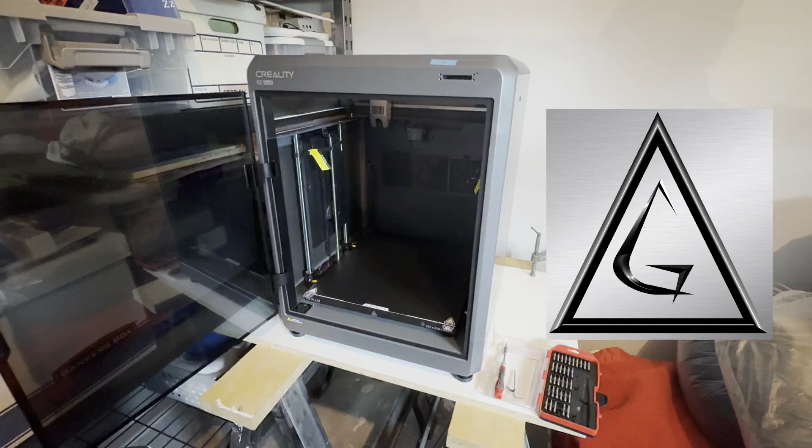Hello YouTube. I just recently got a Creality K2 Plus down in Micro Center for the Black Friday sale, and just thought I'd give you my initial impressions of everything I am seeing here.

No real need to go through an unboxing video per se to go through the procedures to unbox this. Creality has a very good unboxing instruction video on YouTube. There's a QR symbol on top of the box. And everything's just really dialed in and well thought out with how it was packaged. Let's see here. I'm going through some of the last steps now. So they show you all this.

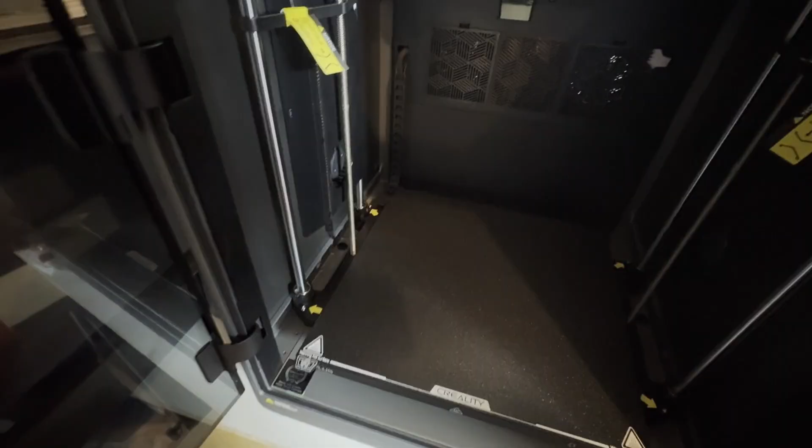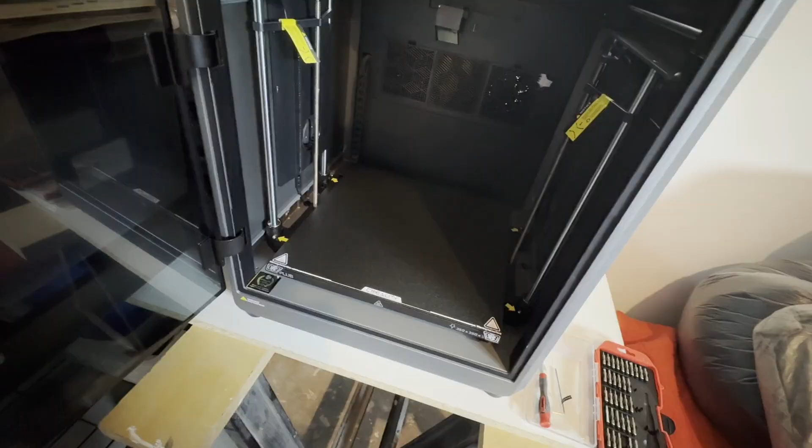A lot of things are screwed in all together. So the bed is held down in these 4 locations. And I saw these little stickers. I thought it was just for the video, but no, they kept them in here for the production units. This thing's been out there for about a year now, so hopefully everything's really dialed in. And just showing you, like, last steps of it.

I have the CFS, the color changing system with it. And this is the basic box right there. So here's the box it came in. This thing I'm holding in my hand right here is the bottom of it. And of course the box lid is upside down. These little cutouts right here, there's little plastic guys that keep it all locked together.

There are some, we call it pull handles on the side. And everything has just the right pieces of foam in it. Really, the machine itself is not too much smaller than the box is. There is a good maybe inch of padding around it with some reinforced cardboard edges, and fairly well thought out.

But I knew this is a very heavy machine, and Amazon's great and delivery's great for a lot of things. But something of this nature at this price point, we have a Micro Center that just opened up here in Florida. So I drove down there and picked this up in person, looked over the box. Recently, my wife bought a beauty desk from Amazon, and it arrived by FedEx. And one of the sides was ripped open, and there's all kinds of parts and pieces falling out in the driveway. So something technical in nature like this, I did not want that to happen.

So check out places like Micro Center. These things are kind of like a locked-in price, so you can buy it online or in a store. You still have to pay tax, so really the price point is the same. Benefit of in stores, you get to see what you're getting, and you handle the transportation yourself, not just, you know, dumped off a turnip truck, so to say, with the package.

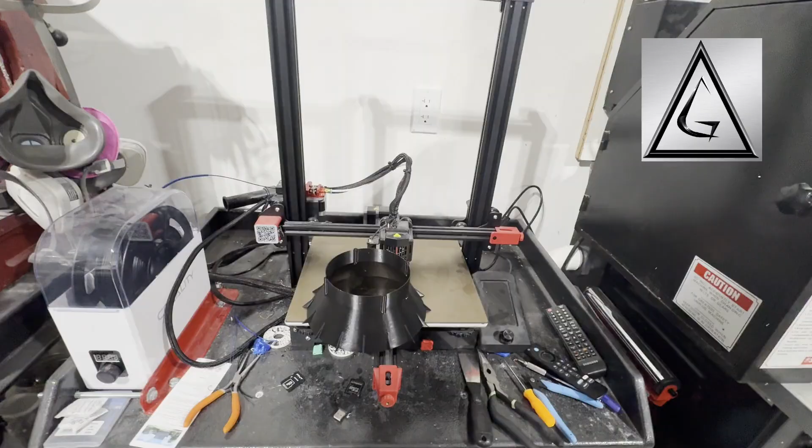All right, for comparison, the venerable Ender 3 Max Neo has around a 1 cubic foot build volume, similar to this new machine. I bought this thing about 2.5 years ago, and there's a lot of hate speech and throwing shade on the Ender 3. But for the price point and what it is, I don't really have any complaints about what the machine is itself exactly. Most of the challenges came in with print settings and getting that all correctly.

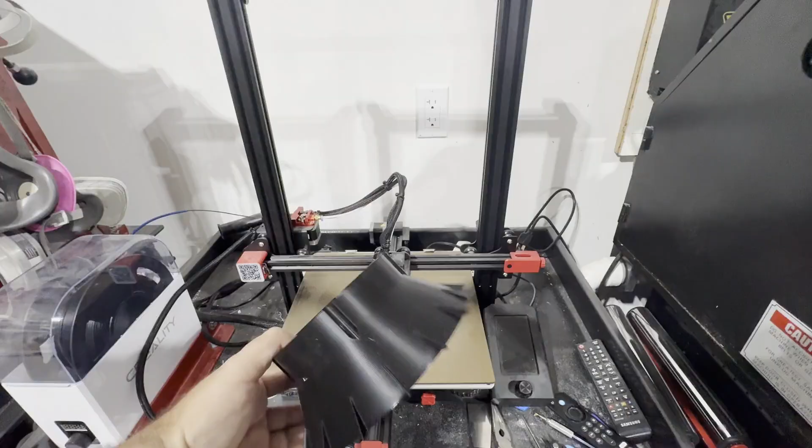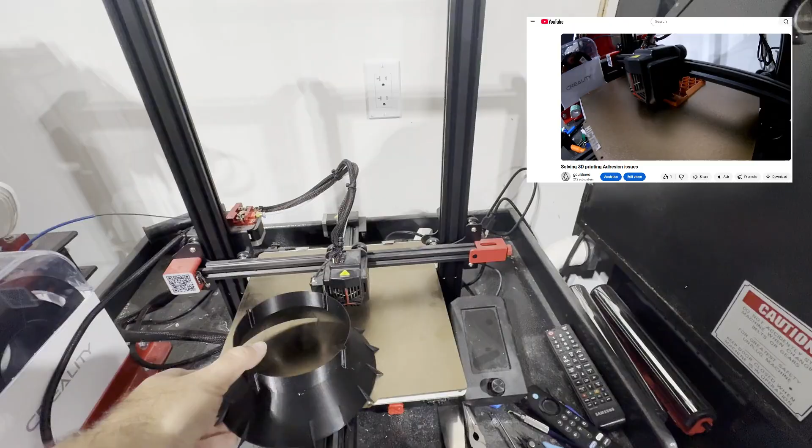I'm able to reliably print things like this little funnel right here. And this is printed in spiral vase mode, very little contact area with the bed, and no adhesion issues at all, because I had those figured out through the settings, and of course the addition of the PEI bed. That's one of the upgrades. I have the dryer box, and I pulled my power supply over there.

Probably the only thing that I should say technically I didn't like about this printer is I wanted to do radio control airplane parts as part of what I bought it for. And if you get the normal lightweight PLAs that foam, they foam around 260, 270 degrees Celsius. This machine will tap out at probably 240. It'll hit a thermal limit. At first I thought there was something broken in the machine, but you go back and read the specs, and that's all it can give out.

So that was a pretty important point on this new machine, to get something that can handle ABS, lightweight PLA, some of these others. Also something that had a direct drive extruder, rather than having it over here with the Bowden tube push and all that stuff.

And let's see what else. Core XY was a key thing. But I've been looking at the different models and makes, and I've seen what was said about the Ender 3 versus what I experienced with it. And there's a lot of, I should say, just Ford versus Chevy, a lot of throwing shade. That really isn't true. Is this the best machine?

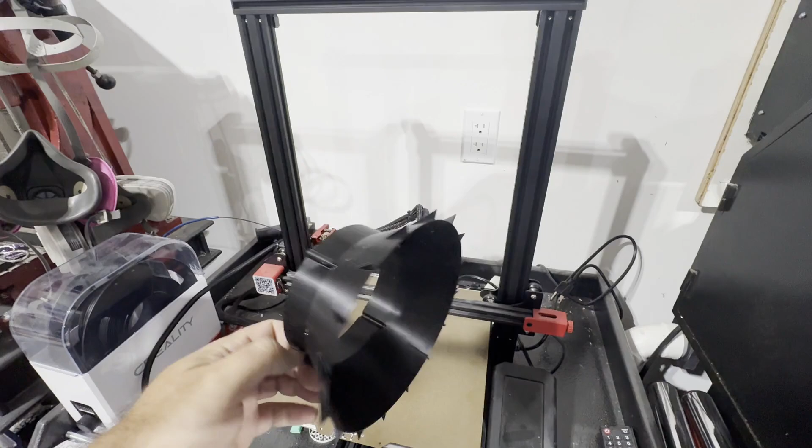No, but has it printed untold numbers of parts for me with really print and go capability? Yes. Once you figure it out, you're printing stuff like this, which, you know, there's complaints about parts like this lifting up, turning into spaghetti. I literally just made the slicer file with default settings. I knew that works. Plugged it in, pressed the go button, heard it spool up, and then walked away, and then 2 hours disappeared.

So anyway, the Creality as a brand, I can't really knock them for bad quality or anything like that. So that's what made me take the plunge on a machine that cost roughly 4 times more than what this did. This one I did order directly from Creality, but the tower right here was bolted assembly to that, and it comes with way much more padding. It's way lighter weight, and they didn't have things like Micro Center. They had, you know, maybe some off-brand at Sam's Club, maybe Best Buy.

But now with the Micro Center down in South Florida, you can go in and get Bambu, you can get Creality. They have a couple of other brands as well. So anyway, that's kind of the push and drive of why I stuck with the brand. Not trying to be brand loyal. I just know it's something that has worked for me.

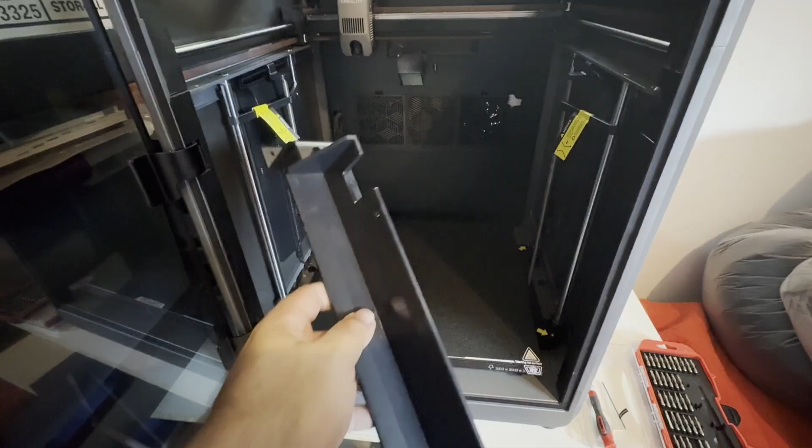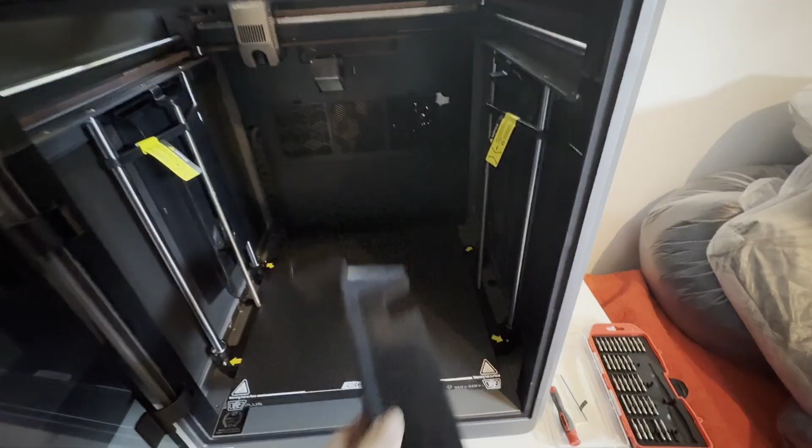And another thing to note here, when you get the K2 Plus with the CFS system, is it's packaged uniquely versus just a K2 standalone. So the gist of it is you get one big box, and it has these fancy little plastic support brackets that screw in here, and the CFS itself is directly screwed into the machine. You have to undo the Allen screws on it to get everything out.

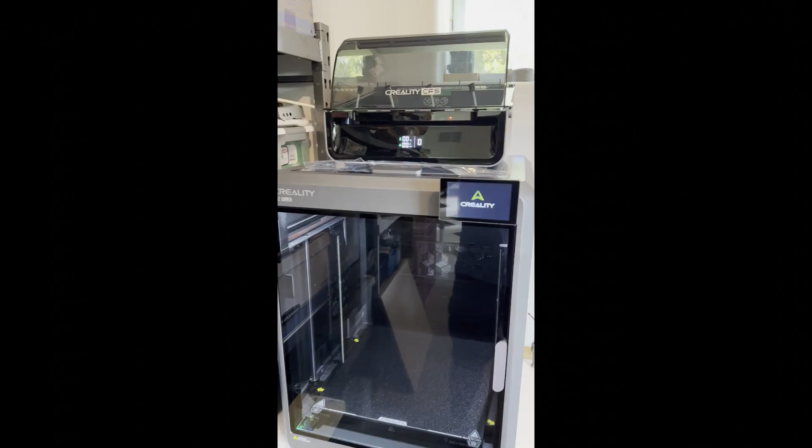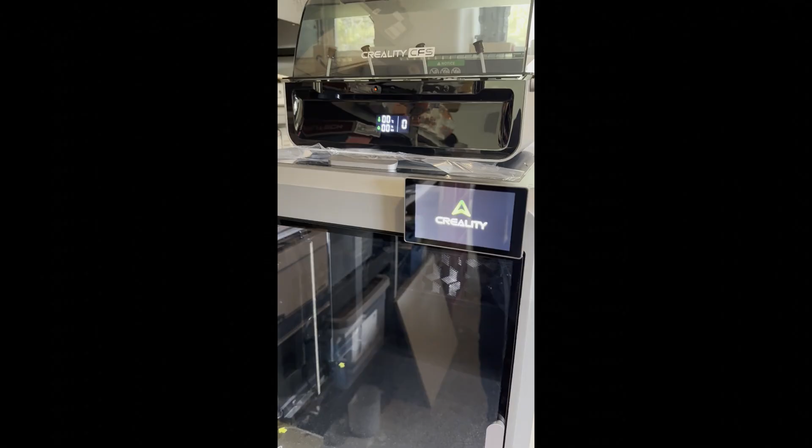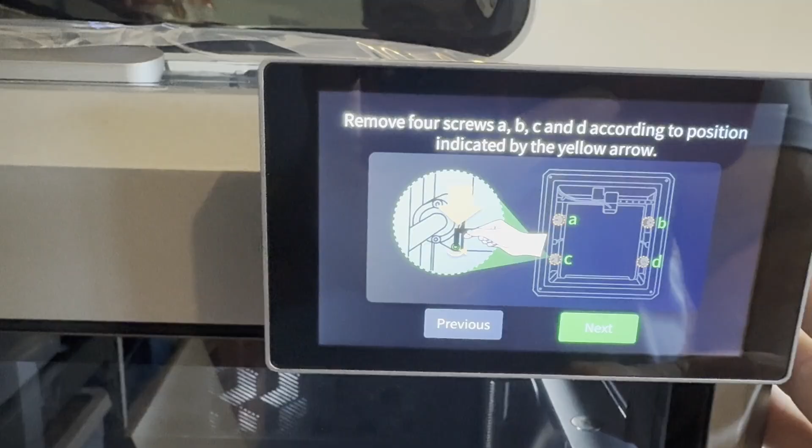All right, we've got the new machine booting up. Power switch is around the back. The screen is thinking about it. All right, going through the setup screen, we are in English. Hit next. Remove the 4 screws, which we have done. I'll show that here real quick. We got that one, that guy, and that guy. And you got a nice little light in there. That's pretty cool. Anyway, so that's all done.

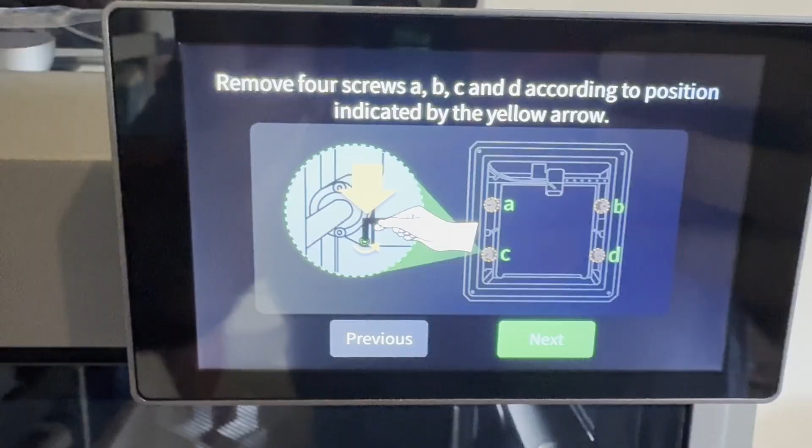The yellow arrow, hit next. Welcome, please keep the green cube in the diagram clear of everything. So yeah, nothing's inside. I'll confirm that. Nothing is inside because that'd be really bad. Standard printer stuff, except for Core XY, the bed starts at the top and descends, versus my older machine, the bed just goes forward and back. So we'll hit next.

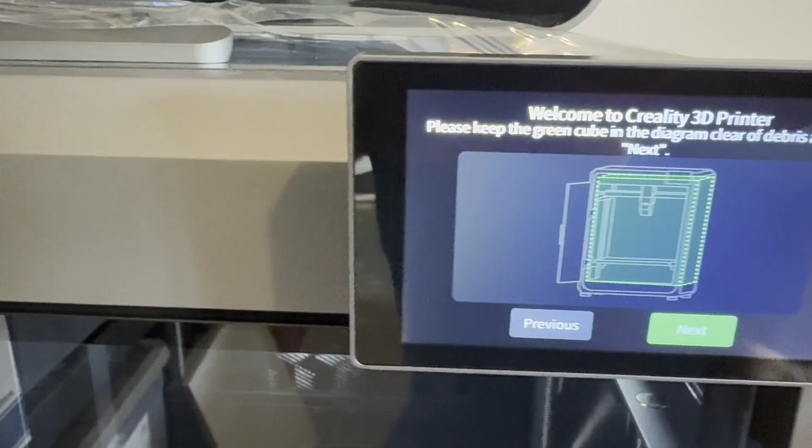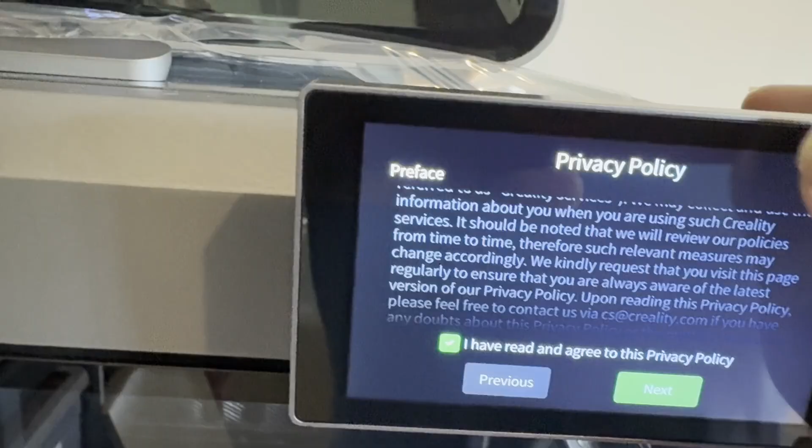Read the privacy policy? Sure, why not? Bunch of stuff. If you're not the customer, you are the product. I don't know, something like that. Next. All right. Okay, getting through.

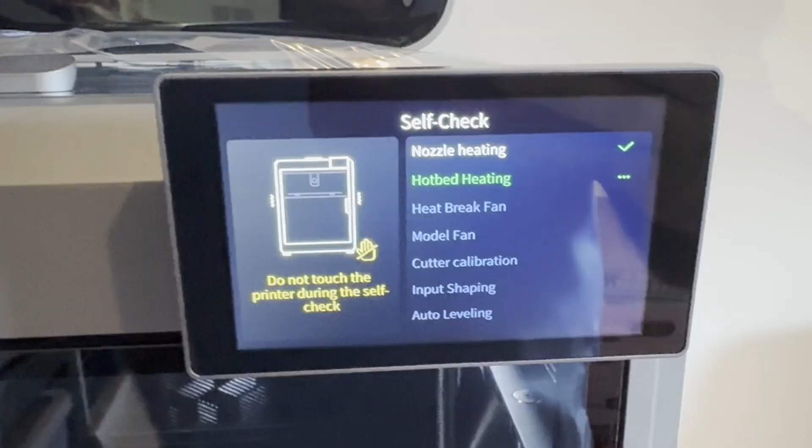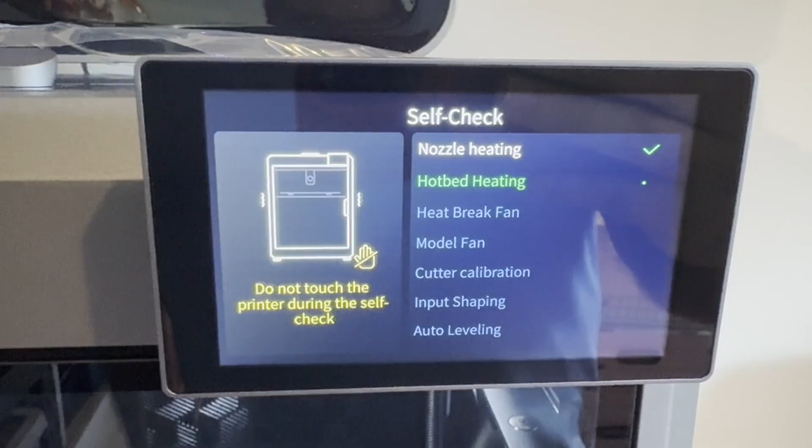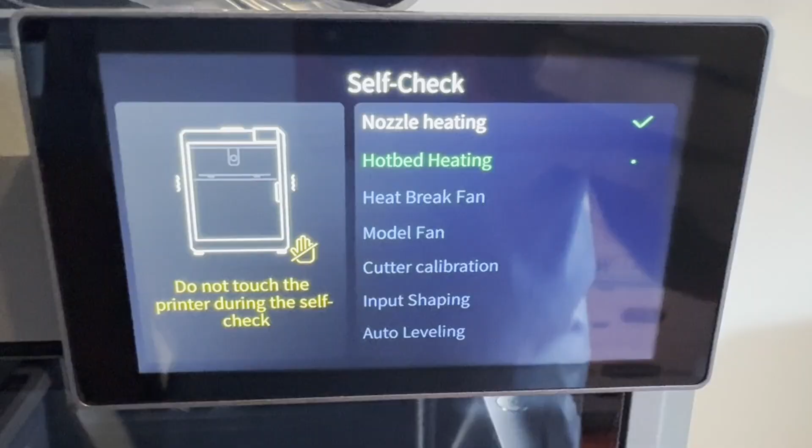Got on the network, and then there's Creality Cloud. I downloaded the app, but I'll try to mess with that later. Anyway, it's going through some diagnostics right now. No filament in the CFS, but it has temperature and humidity. So apparently this check takes about 16 minutes. Cutter calibration. It's going all the way across. Okay, Z-axis is going down.

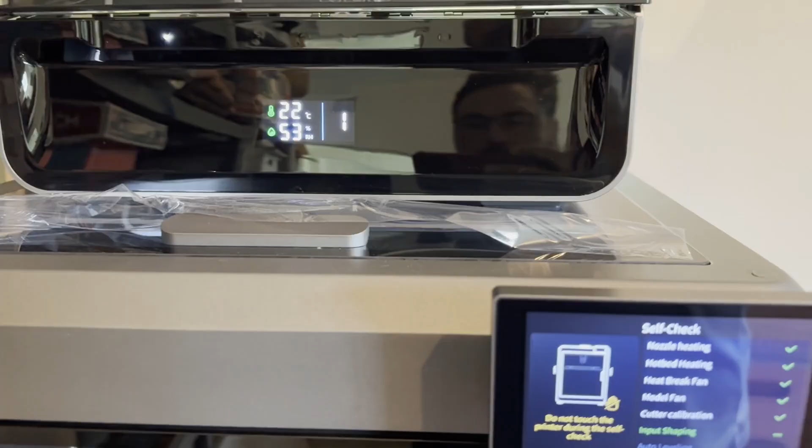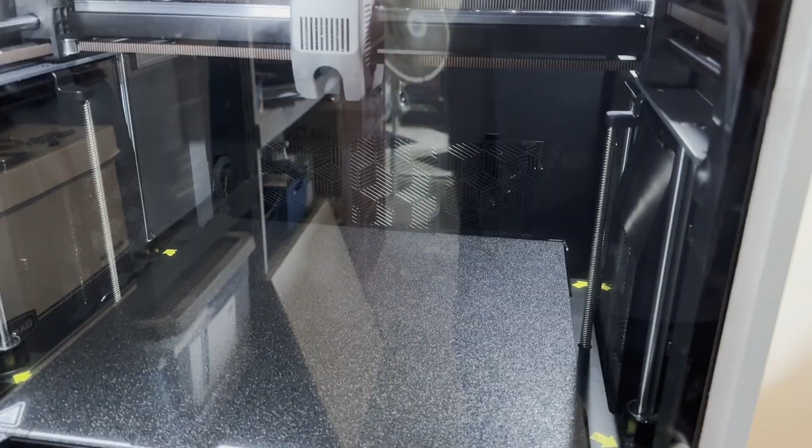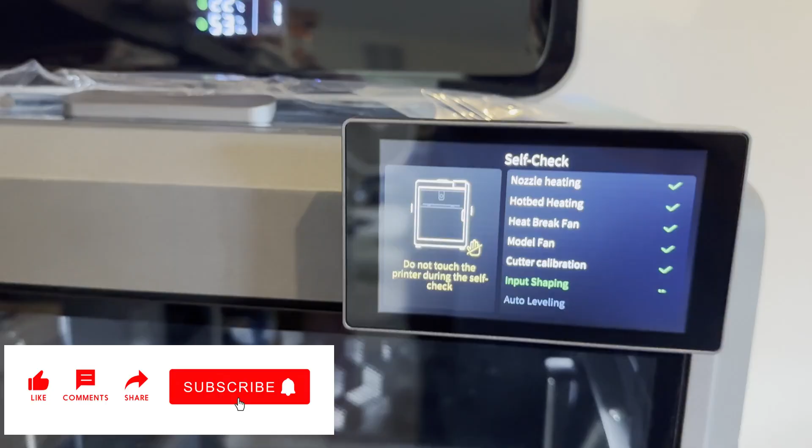I have to say, if you're on the fence about the CFS, probably best to just get it from the get-go, as everything's just so dialed in. You could always add it later, but let the learning curve be once, I think, with this kind of stuff. Okay, we're approaching takeoff speed. I don't know what this is about. I think it's a fan or heater running on the side.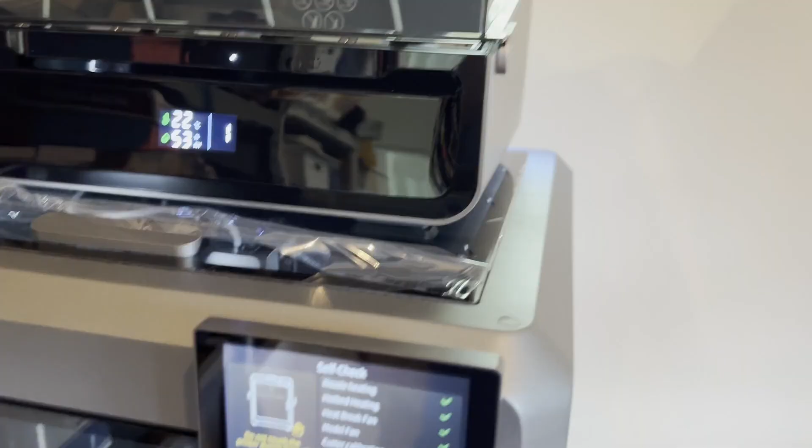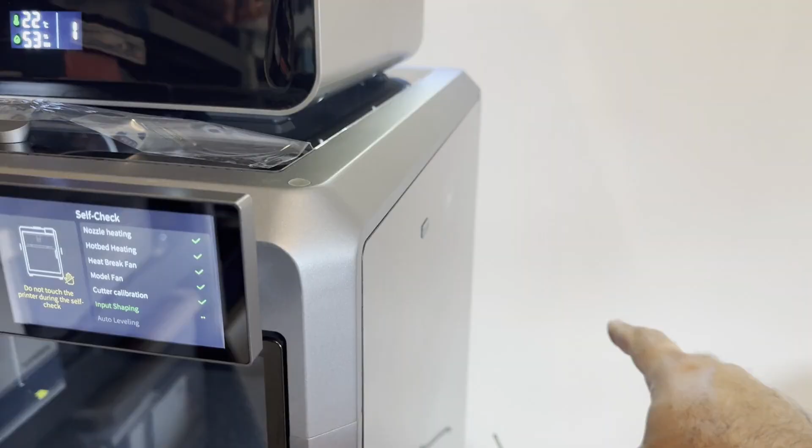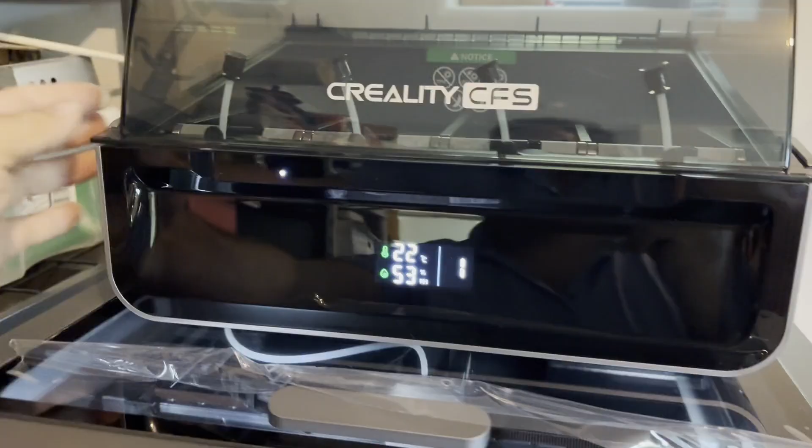One thing to note about the CFS kit is they only give you enough Bowden tube, and one of the data cables is only long enough to have it on top. If you want the CFS to the side, I'm gonna have to look into some longer Bowden tube and longer cables available through Creality. Probably ought to have that thing shut and locked. There's little locks on the side. Anyway, that's gonna be the preference.

I think I have a storage rack in this room, so I'll probably just reconfigure it for it to sit on the shelf and probably have the CFS to the side, and then the venerable Ender can sit next to it for the whole setup. It's going through this thing called input shaping, and it's making like a vibration noise.

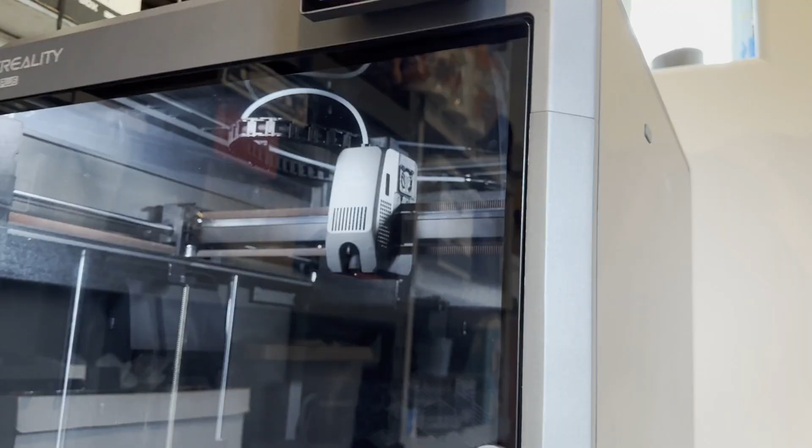Not quite sure. Maybe those are shaker motors or something to get this thing calibrated in. And I have it sitting on two sawhorses. Just kind of wanted this thing out in the open just to get it all set up and running.

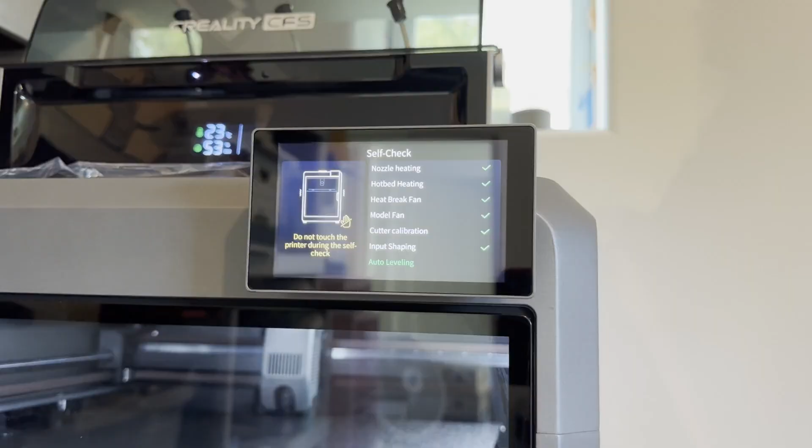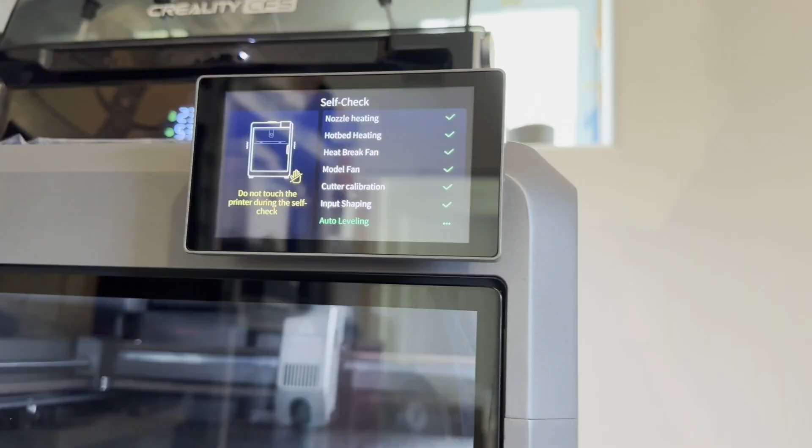Now we're going through the infamous auto leveling system. Apparently the heating element, the hot end, is the touch probe on this thing. Anyway, a lot of noise. Hopefully this thing will be quieter under operation like my Ender.

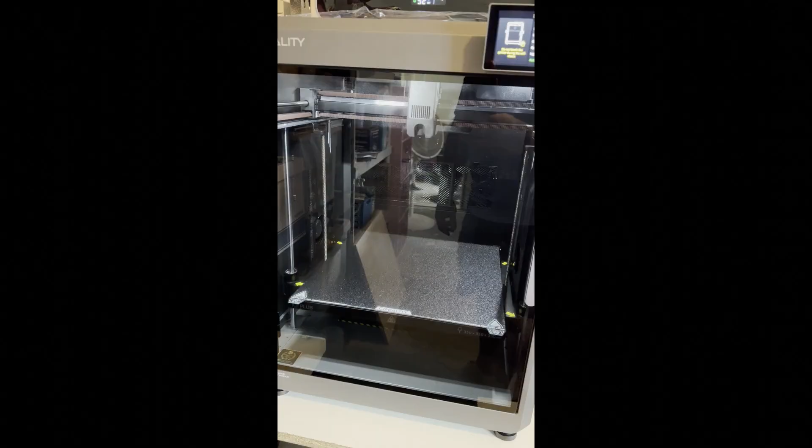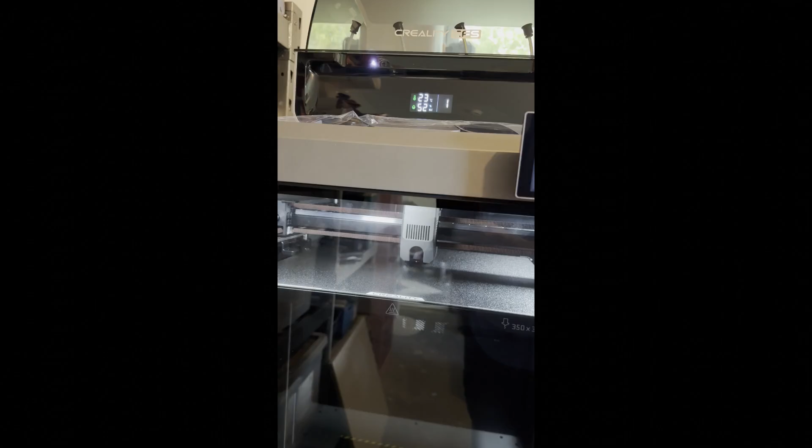This is the most unusual auto leveling thing I've ever seen. Normally the Ender just touches 25 points in a grid, a little touch probe. But this thing's doing its own little thing right now. Alright, this is a little bit more of a normal auto level that I'm used to. So it's going around and touching a bunch of points.

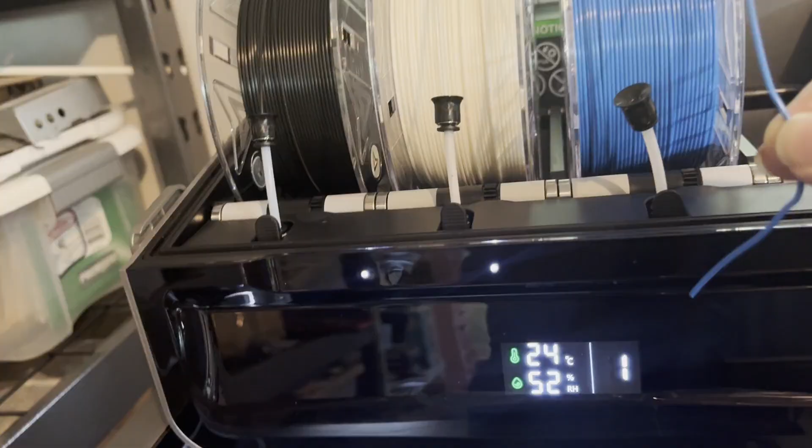Okay, setting up the CFS with the supplied filament. Has RFID tags in it so it knows what's in there for this brand. Anyway, they lock in the filament on the side of the spool, so you're going to want to nip that. So you do not want these tight bends in this filament going through the system.

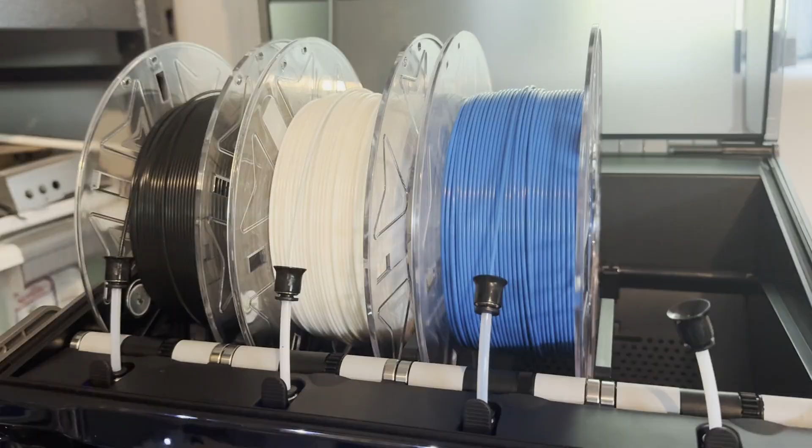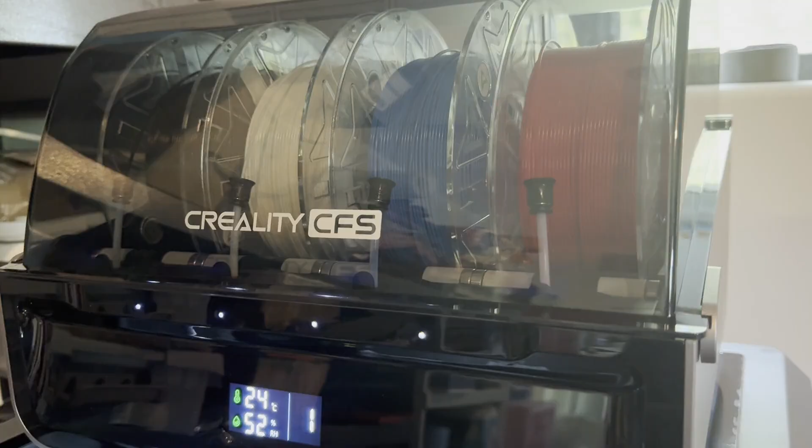It wasn't quite clear in the video, but anyway, you put the spool in, and I'm sure that RFID helps. But anyway, you put that in there and it'll auto grab it. And there we go. There you go. So that's the setup of each roll, how they go. Should note, closing the lid makes it quieter than having the lid open. Of course, in normal operation, it won't be going this fast for a print.

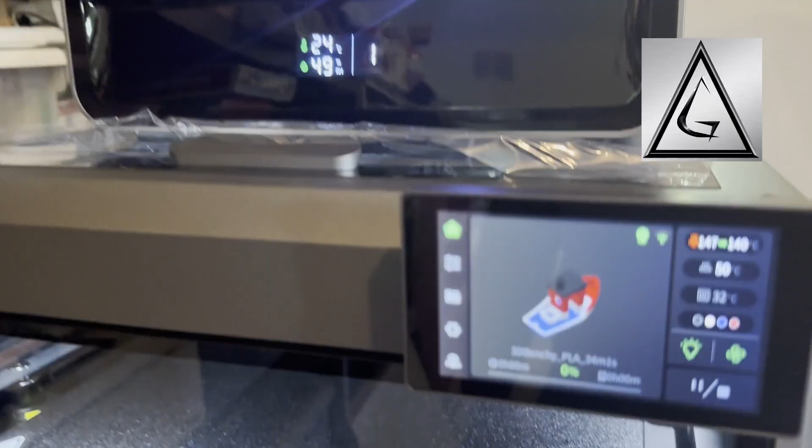All right, filament's all loaded, and got a multicolor benchy going on. So everything's spooling up. We'll see how it turns out. So that little action right there, that's the little guillotine for the filament as it changes out colors.

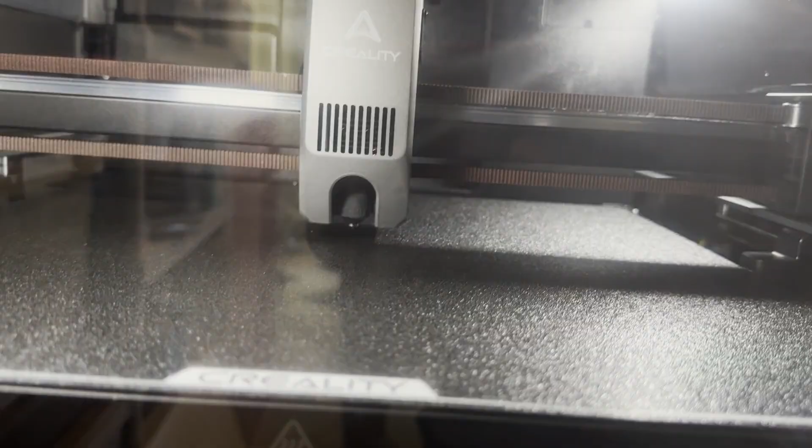Okay, I just got done with this first color change from blue to white on the benchy test supplied. Everything's adhering fine. Extremely fast. Like if this is the Ender, it might have been, I don't know, 16th inch up by now.

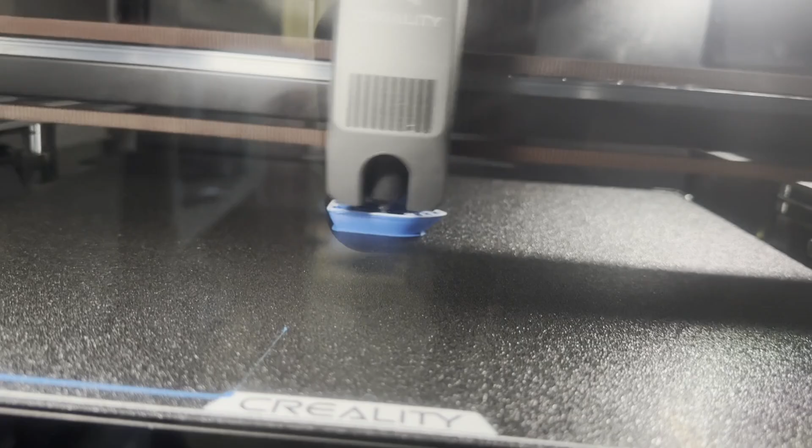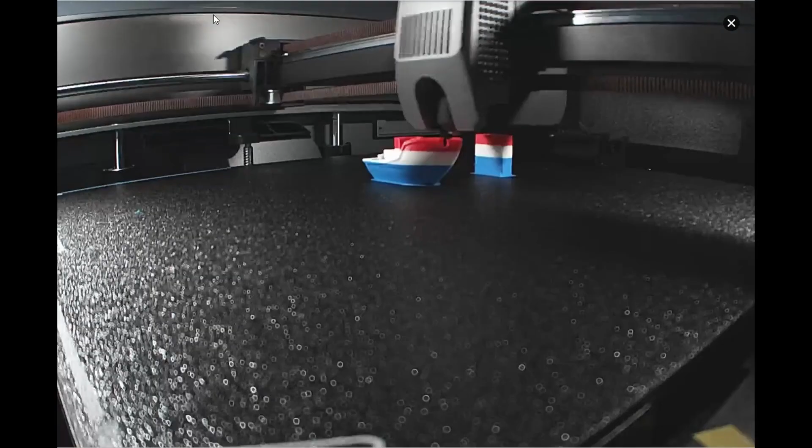Alright, here I am on my personal computer, logged into the Creality Cloud, and I'm watching the print from here. So this is a 4K monitor, but anyway, that's showing what I'm seeing right here. It's pretty epic. Okay, we're on Creality Cloud right now on my account with the K2 Plus. So you're seeing real time what I'm seeing on a fairly standard size computer monitor right here, my one off to the side. It's gone through three color changes now, or it's on the third color, I should say. So it started with blue, white, now it's on red.

You can almost get a better view of what's going on with this camera inside the machine than actually looking at it. Of course, it's a small benchy and a big machine, but very impressive technology to be able to see this real time. You can, of course, send files to the cloud and all that, and it has a free version, which I think gives you most of the functionality. And then there's a paid version on a subscription basis, I think, so that gives you some extra functions. But very impressive to see how everything's working on here.

All right, it's going through a color change right now. Last one will be black. So you're just sitting there. I think it's extruding some stuff out of the back right now. And I'm not sure if it prints this thing every single time as just like a purge tower, maybe, not sure. Anyway, that is one drawback to this particular machine with CFS: you can do the multicolor prints, but you're gonna end up with a lot of waste. If you can do something with that, it's fine.

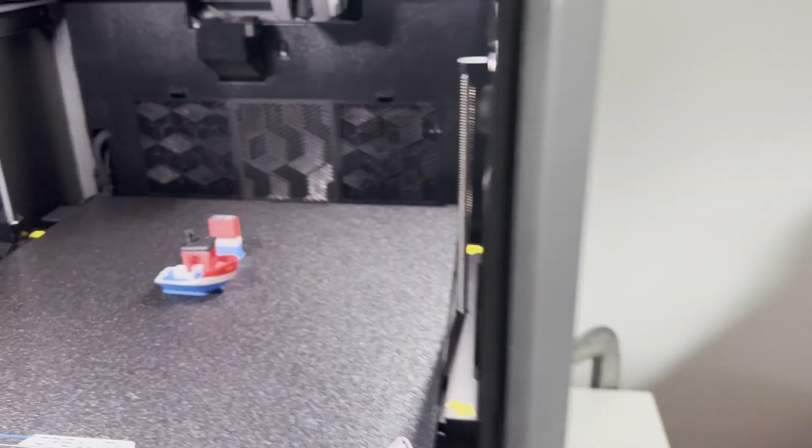All right, just finished the Benchy. First look at it. Smells like nice molten plastic in there. And there it is. I probably let that cool off.

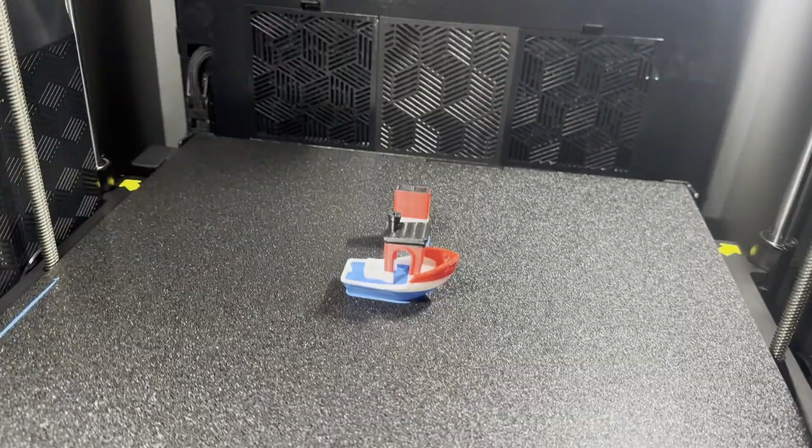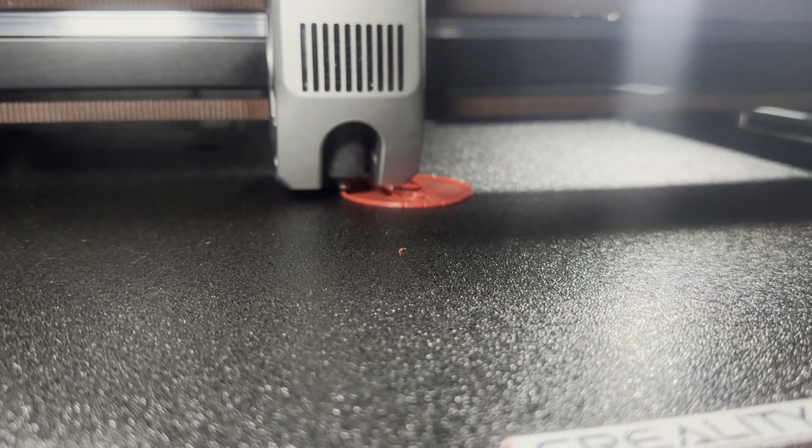Alright, here we are testing that spiral vase mode. Bed adhesion looks excellent. That's not changing any settings at all. So normally I have some defaults that I've custom tuned in for the Ender 3, but using the Creality slicer, no problems noted with bed adhesion. It has 2 layers and a crisscross. And it's already doing the vase mode. It already has the floors adhered. We're using the red in there, and this should be done pretty quick.

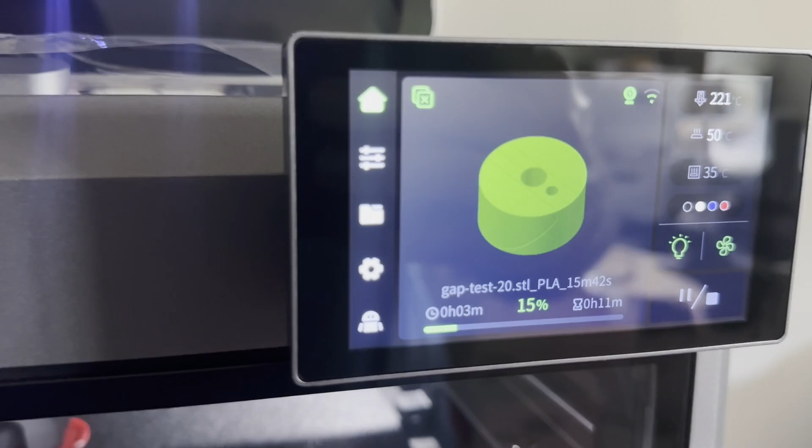I'll try touching the screen here. There we go. So that sending the files through the network thing's really slick. That's something with the Ender that's a real pain in the ass. It's taking a little tiny thumb, what do you call it, SD card, and sticking it in the printer upside down under the bed. So this digital file send is definitely the way to go.

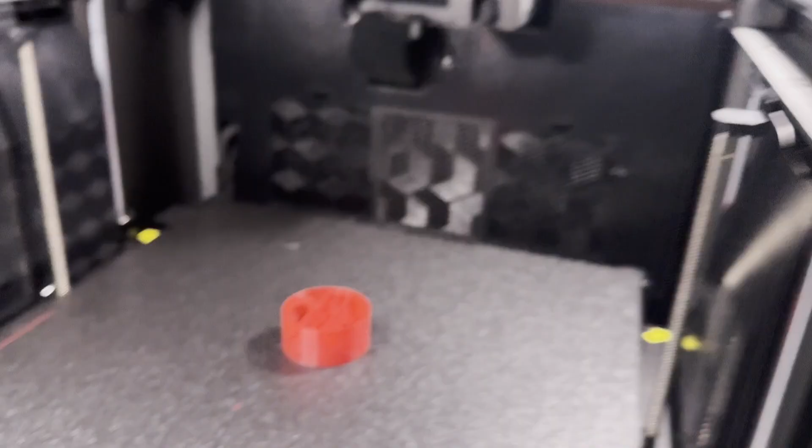All right, finished with the spiral vase mode test. Looks pretty good here. I need that to cool down a little bit. Grab the little thing. Just get an idea of what it looks like. The shape is correct. It's just a matter of how much strength it has. See, like things like that. The walls are separating, so they'll have to be tweaked. The settings and everything on the Ender prints, basically they make contact and it adheres together. But overall, pretty darn good.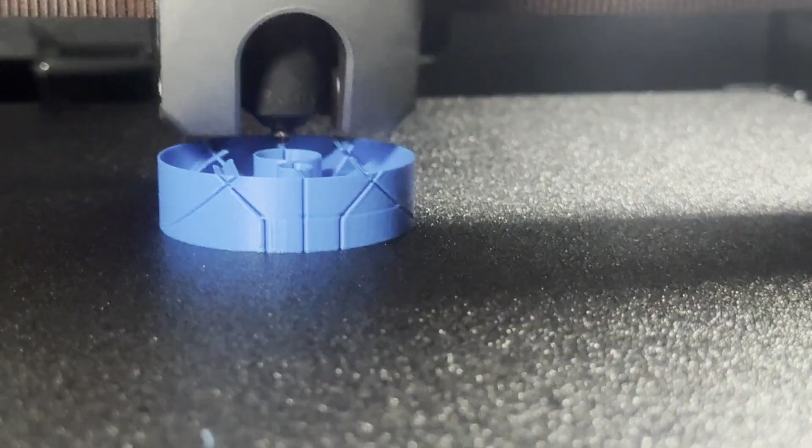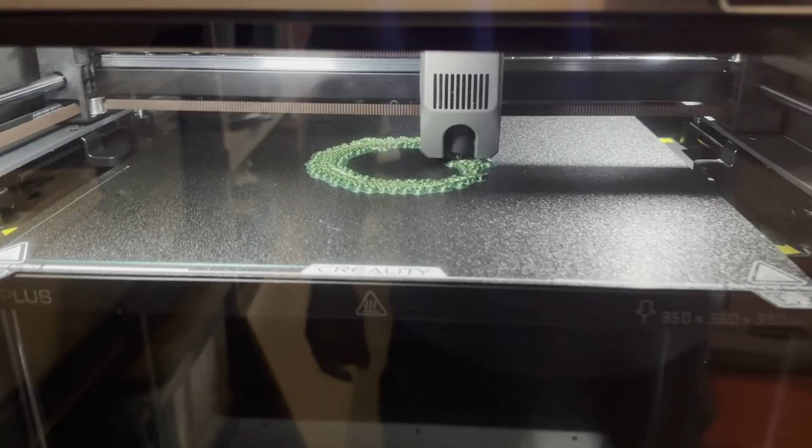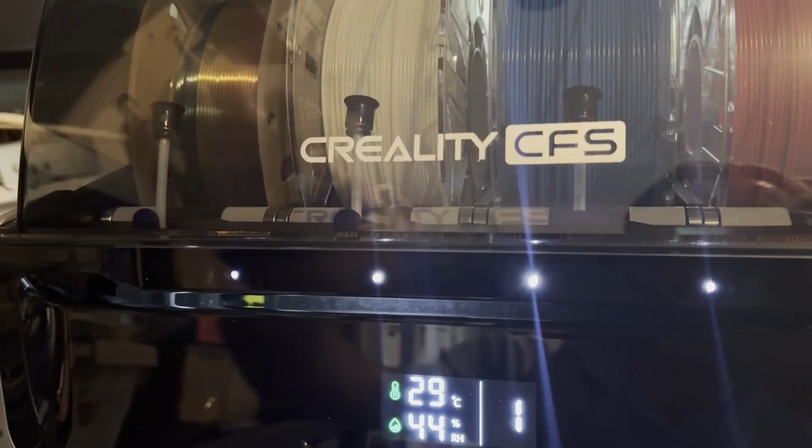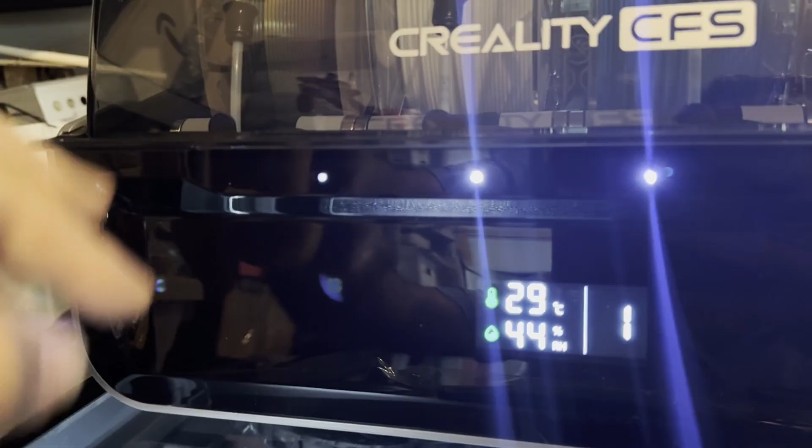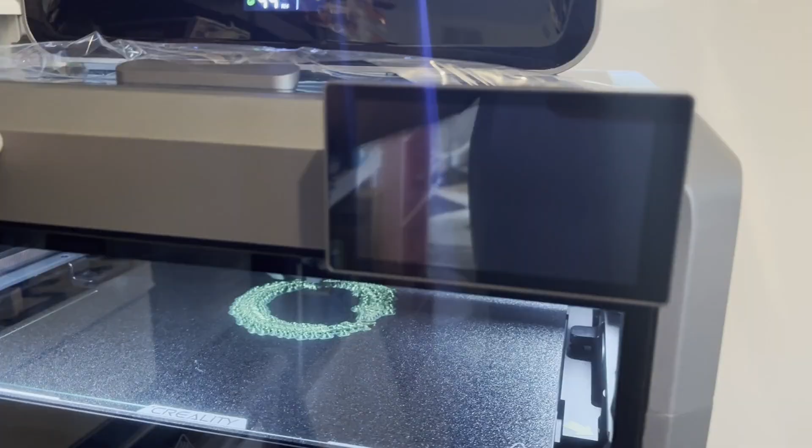But yeah, overall, first impressions, seems like a very high quality machine. Everything's super dialed in. There's no, like, I call it COTS parts, like all the micro switches and the stepper motors are all hidden behind things. Seems very clean. What you're hearing right now is kind of an average level of sound vibration. It's not really moving that much, but you definitely want it on something solid. I wouldn't have this on something with wheels.

It is a little heavy, so anyway, my intent is to reconfigure this adjustable shelving, have it on there with the other one, and move a lot of 3D printing stuff in here. This is on a 15 amp circuit, and this one's running it just fine. Two of them, I have no idea, but I'm not really looking to start a print farm. Really, I'm just maybe make a couple products, sell them, see if anything catches. But that's the gist of what this thing is. We'll jump over to a computer for more details.

All right, I got my first print going of something I designed myself and sliced myself. I'm using the downloaded Creality slicer software. I put a G-code file in there directly, but it's giving me some errors. So anyway, I just loaded the STL file in there. I'll show you what it's going to be making. It's a test item for spiral vase mode test.

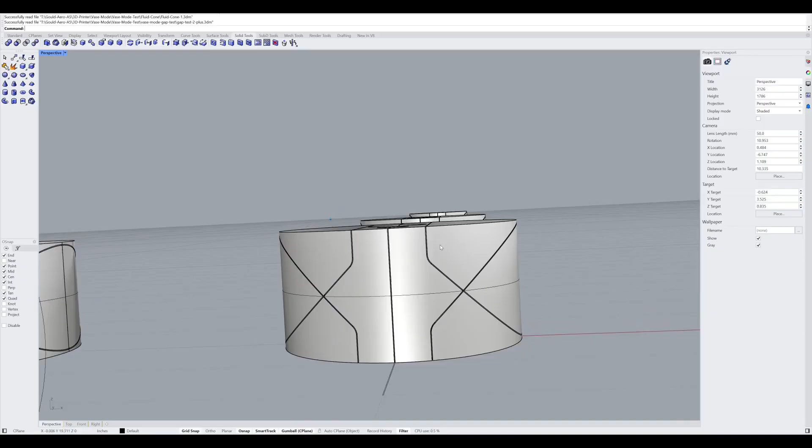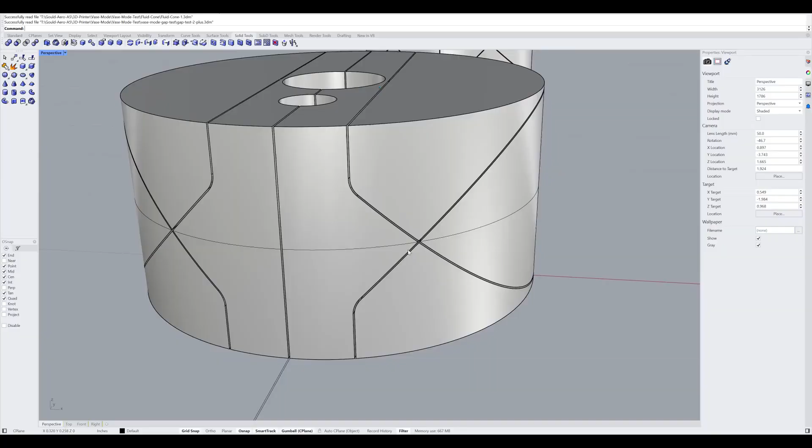So all these little gaps or cracks you see here, often called fjords, the printer will go around and go into each of those in the print. So it's just testing the gap, like this kind of gap, and then end-to-end gaps. And the idea is to dial them in as close as possible so everything connects. So you can print structural items in spiral vase mode. Quite the involved part. Let's see if I can move that out of the way.

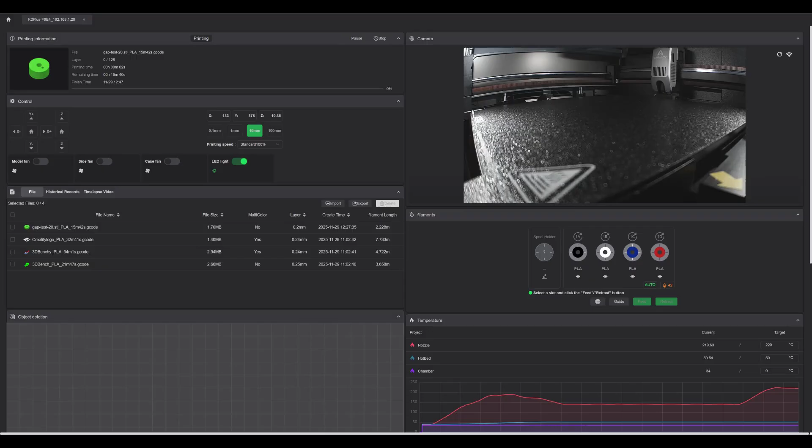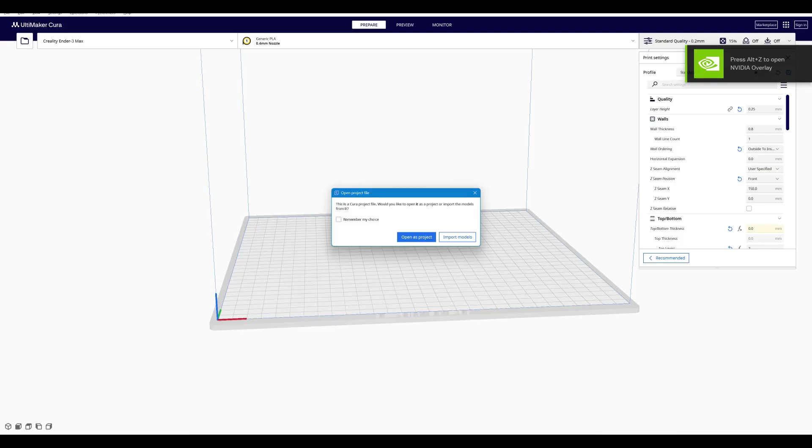And I'll go try to load the actual gap test STL. Just reading through some files. Gap test. There we go. 3MF. UltiMaker Cura. So Cura is my default slicer software. So it's loading up right now. I didn't want to interrupt the Creality software just because it's doing a print from the cloud kind of thing. There we go. Open project. Open. But this will give you an idea what this thing is printing. So let's see here.

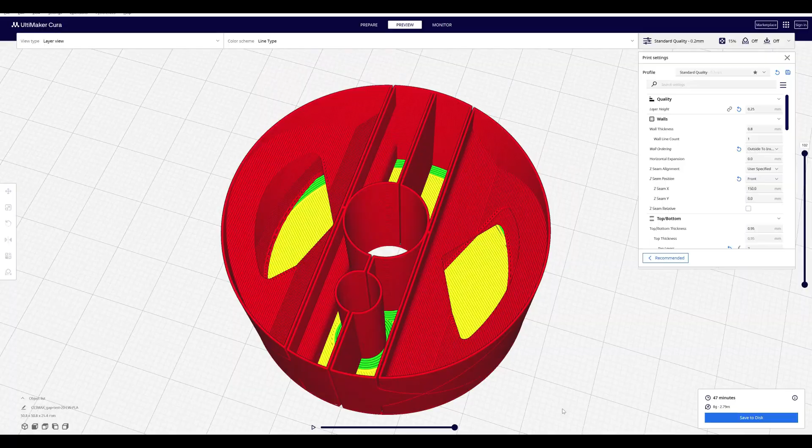Slice it. Cura is my default. I've tried some others before, but Cura, there's a ton of options buried in here. Maybe some of these things are by default now. But that's what this thing's going to print. So you can see all the layers. And we'll shrink it down a little bit and I'll play it so you can see what is going on.

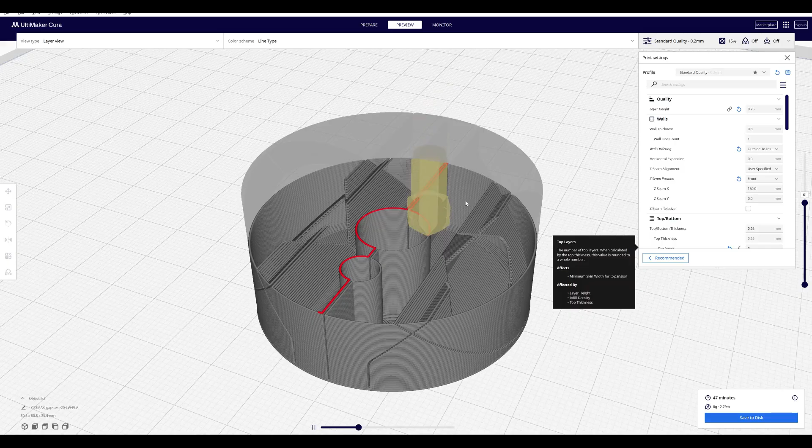So anyway, it took quite a bit, but this particular test item kind of tests out everything you would need for a structural spiral vase mode, particularly for things like radio control aircraft wings, where these could be like internal ribs with lightning holes in them. It follows that 45-degree overhang rule right here. You got two ribs crisscrossing, so that covers that. And anyway, that's everything going on there.

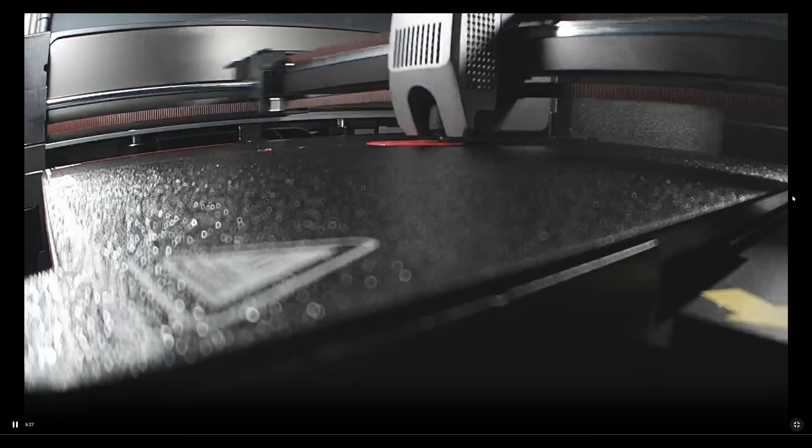And we'll hide this real quick. And let's see here. So I got a friendly reminder right here from the online Creality cloud. It's talking about just make sure you check your first layer. Let's see here. I get back to the gap test. There we go. So you can do this on the screen. That's looking pretty good to me. I'll go check it out here in a second.

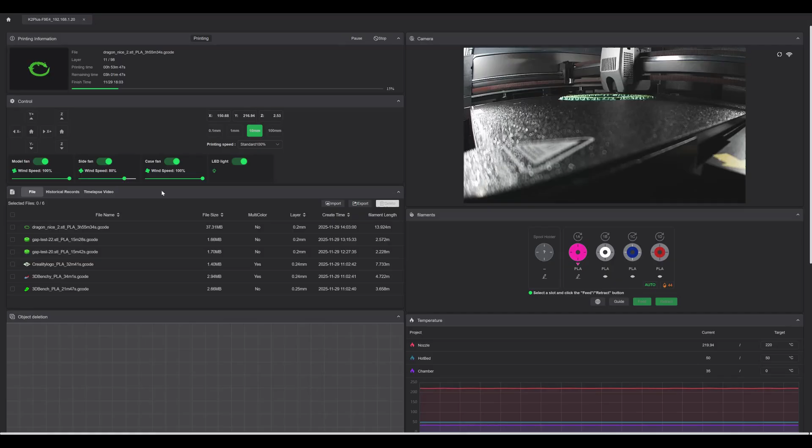Wrapping up the video, we have that print that you just saw earlier running. It's an articulated dragon. And let's see here. Go look at some stuff here. So this K2 is listed on the holiday shopping list down here.

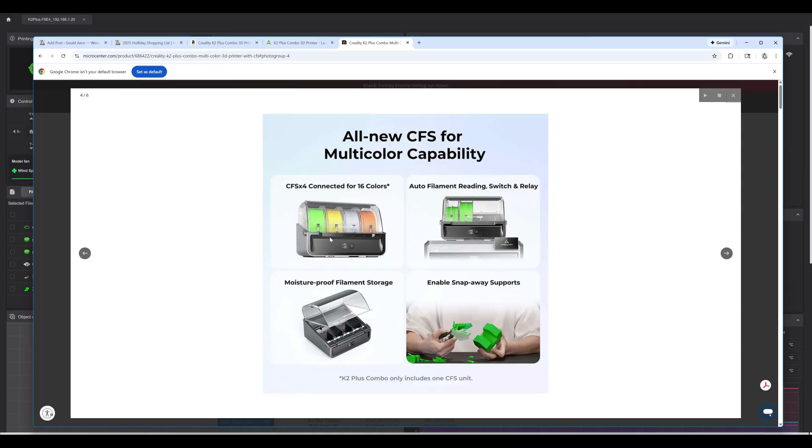So I don't think I'll be doing too much multicolor printing, but I'm certainly going to be switching, like I said earlier, a black print, a white print. Currently we got rainbow filament going in there right now from an off brand. If it's an off brand like Sunlu, like I use a lot, there's no RFID on it, so you do have to do a little bit of manual entry on the touch screen.

Everything happens through this touch screen right here. This guy is just a readout of temperature and humidity. Also has an indicator light showing what filament is under use at that time. Let's see here, trying to see what else I can tell you about it.

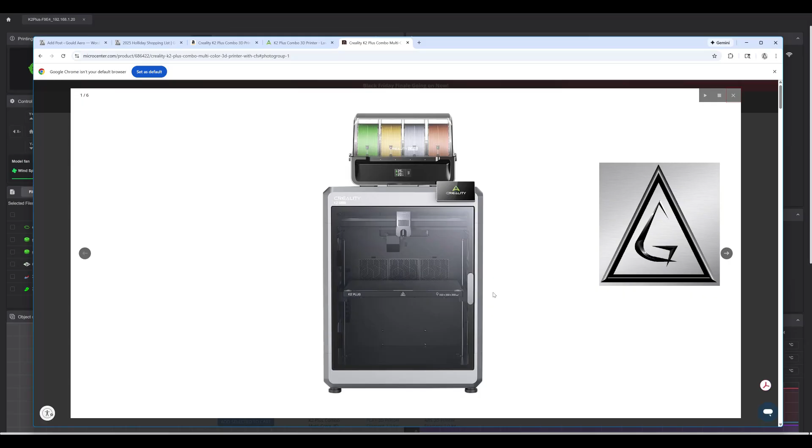I didn't see shabby quality or them skimping on anything. I think they're really bringing their A game to this, and honestly, I think they're gearing this machine more towards the pro print farm level. That's really what this machine is geared for, the optimum customer.

Certainly for the home hobbyist, it's taking out an ant pile with a stick of TNT. It's a major overkill, but it can do all kinds of things. So the shortcomings of this, actually showing it in this view. So the price point where it's at is 1,200 bucks.

Is what I paid. The CFS right here for the filament can only sit on top of the machine as shown right here with the cable lengths and the Bowden tube lengths provided. So I got on Amazon and I got longer Bowden tubes and I got longer data cables. So 2 longer data cables, 2 longer Bowden tubes. I plan to put this thing on that Sam's Club rack and have the CFS off to the side and hopefully have room for if I ever get another one of these underneath it.

So that's one shortcoming is they probably should have provided two longer cables and two longer Bowden tubes for a side setup. It's not the end of the world. It's not really big money for that kind of stuff. Trying to think what else there could be here. Now, obviously, it's the printer.

It's almost like a subsidized business model where they're probably taking a loss potentially on these printers or very razor thin margins, and then the idea is you make it up with filament, especially with this provided RFID filament. The quality of the filament provided, looking at the prints, I can't really complain. It acts great. That RFID for simple setup makes it very friendly.

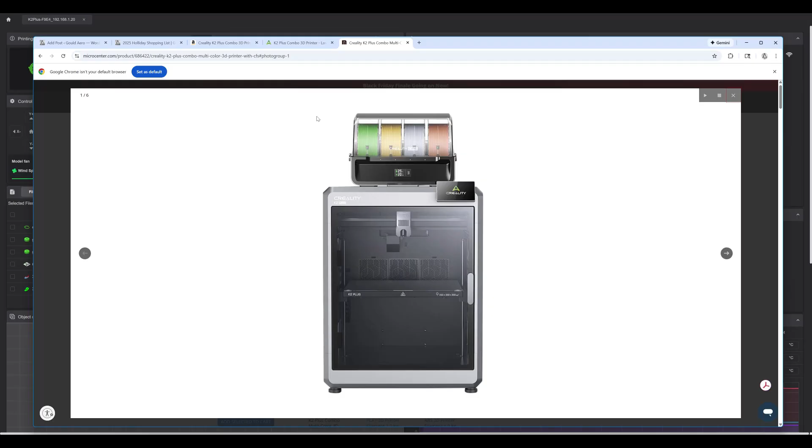So again, looking at Amazon, normally I'm looking at Sunlu. Let's back this up. So this is Sunlu filaments. We'll throw some links down below. These don't have RFID. I'm not sure what Bambu does with their system, but Anycubic and Creality have RFID. I don't know if they're cross-brand compatible. It'd be nice if the industry kind of made something common with all that. Honestly, the RFID little sticker that goes on there is a pretty low cost item.

It's just adding it. But the Sunlu stuff, one of the benefits for me, I'm down in Florida, but they have almost all this stuff in stock, so it's actually available the next morning, like 4 to 8 a.m. if you really want it that fast. But it arrives very quickly. The Micro Center, just to grab a roll of filament, is too far away. And honestly, this arrives by Amazon just fine.

And it's not trying to be an advertisement for Sunlu. I'm not subsidized by them in any way, but just letting you know the main filament I use. And I've run a lot of spools of this stuff, but they have pretty good deals, good quality, a lot of options. They'll have these other kinds of things like the gold and the silk filaments, rainbow filaments, as you can see right here. So that's a good backup one here. But yeah, it's worth checking out.